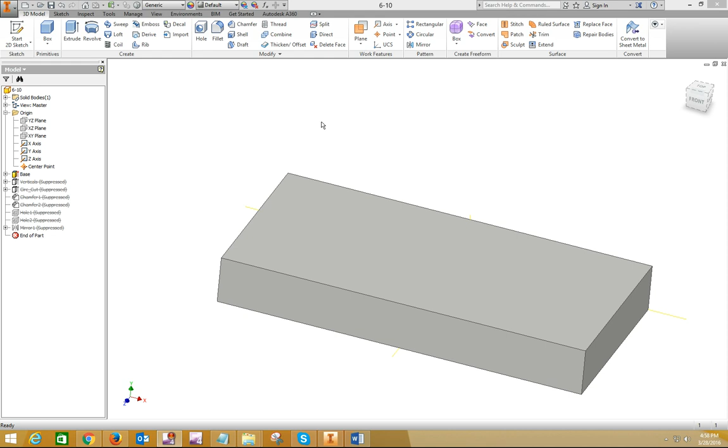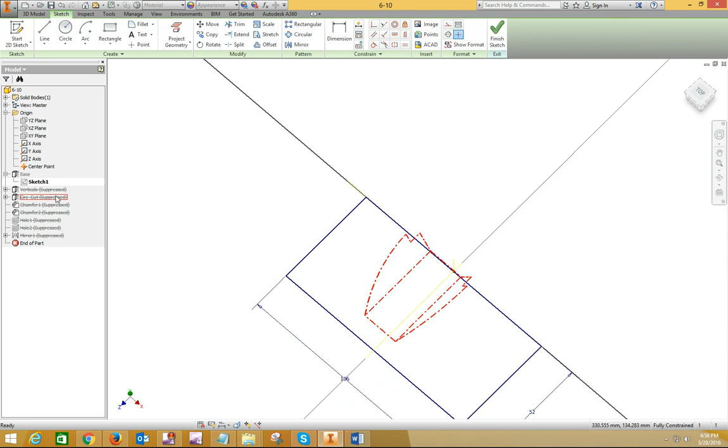When I made the base, let me flip it around here. You can see I centered it on my origin. So it's on the x-axis, centered on the y-axis and the z-axis. Because everything on this one gets extruded from the front. I'll show you it's just a rectangular sketch constrained onto the x-axis and it's centered about the y-axis there.

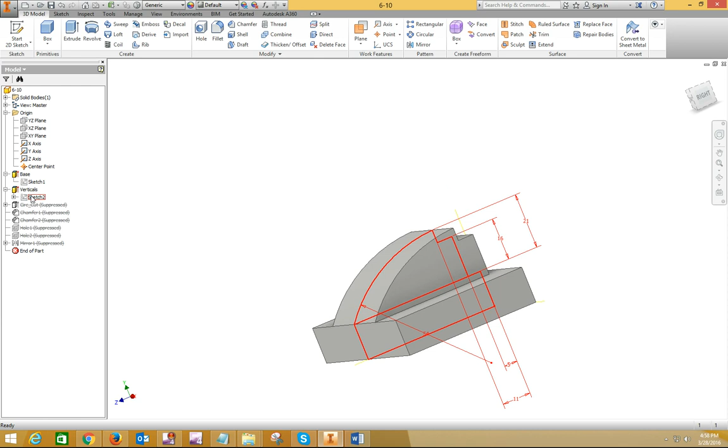Okay, the vertical, I did a profile of that and then extruded it both ways. Okay, so I just did that sketch and then extruded it both ways.

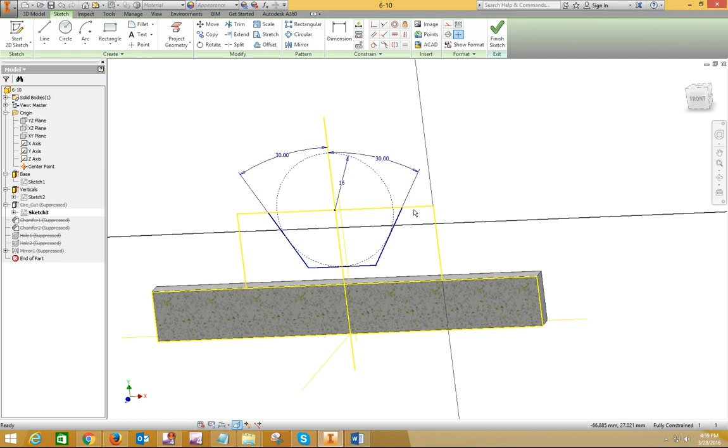The difficult part on this one is this circular cut. And I'll pull the sketch up for that so you can see it. I projected the geometry of that vertical piece, drew in my profile, and see it's dimensioned about a 16 millimeter radius circle.

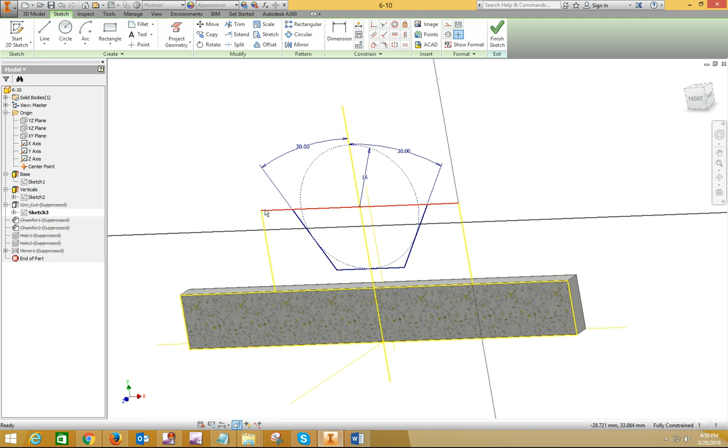Okay, so the sides are tangent to that, but they're at an angle, and that determines the size of it all. Okay, and it's based on the top edge of that profile, which is missing. Okay, the notches are cut out of that. So I'll come around to the back and show you the sketch there so you can see how that works out. And then I just extruded it to the front to make that cut. Okay.

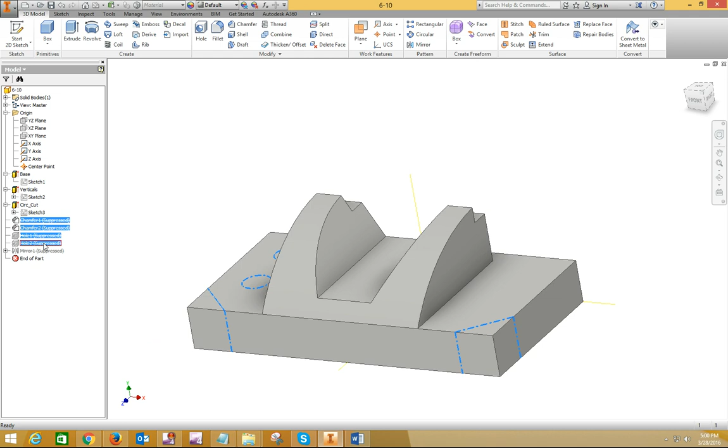The two chamfered corners, I just used the chamfer command. Did those. That's pretty easy. Well, I thought I was unsuppressing those things. Just do all those at one time.

Now the holes, if you notice, these two holes are two different sizes. The one in the back is 8 millimeter, the one in the front is a 9 millimeter. So I created both of them and then mirrored them to the other side.

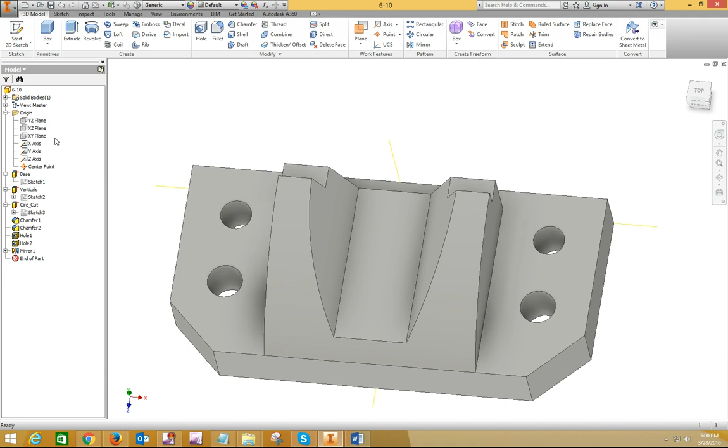And because I centered this on the y-axis, I was able to use that YZ plane to mirror those holes to the opposite side. Okay, so that's just a quick overview on some ways to create that. So I hope that helps you out.